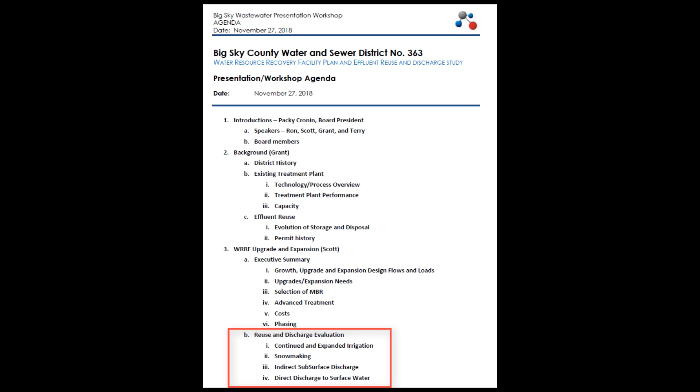Okay, this is part two, the presentation given on November 27th of the conceptual design report for the Big Sky Water Resource Recovery Facility expansion and upgrade. We ran long and ended up skipping the disposal slides and the disposal portion of the presentation. So today I'm coming back to go over those slides, record them, and Ron will add them to the website.

So we're going to pick up about where we left off on the 27th of November, which was disposal alternatives. We looked at essentially four reuse and or discharge alternatives. Snowmaking was technical memorandum number 11. Indirect subsurface discharge, tech memo number 12. Reclaimed water irrigation, so further development of purple pipe, is tech memo 13. And then direct discharge is spread across two tech memos: 14 is the analysis of disposal, discharge in the river, mixing zones, all that, and tech memo 15 is the outfall pipeline to get to the river.

Tech memo 10 gives a very brief overview of what was done with all of these subsequent reuse and discharge alternatives. So if you just want the short story, you can go to tech memo 10. If you want to dive deeper into any of these alternatives, you would go to their respective technical memorandum.

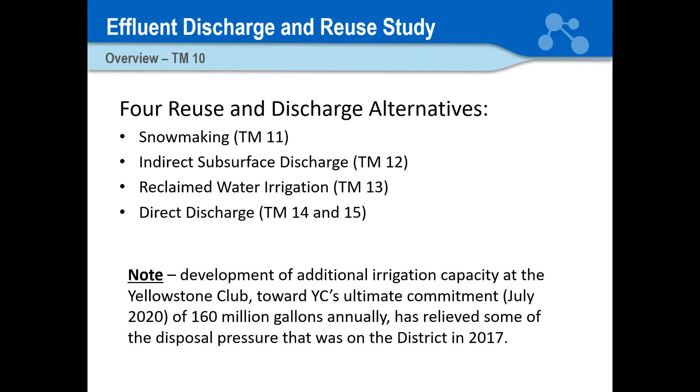This slide is also, it's in Tech Memo 10, the overview, and it's just showing the alternatives that were given a hard enough look to put a conceptual level cost estimate on it. So I'll just run through these real quick.

The snowmaking with reclaimed water, we looked at the Southern Comfort area of Big Sky Resort and disposal there. Now, a lot of the comments were, well, we can do a lot more than 16 million gallons. We don't disagree with that. It's just this was kind of a surrogate case to look at million gallons per acre, or just everybody being able to wrap their head around a given area, in this case Southern Comfort. How much can you dispose of there on average in a typical year? Well, that's 16 million gallons.

If Big Sky Resort and Spanish Peaks were to work together to put in more infrastructure, more guns, and cover more area, certainly you could get rid of more, but that's not in the district's control, so we just capped it there. The end result of that is not a great economy of scale, because as I'll show in a bit, you would need multiple pump stations and quite a bit of pipeline just to get to Southern Comfort. So it's approximately $2 million for 16 million gallons of disposal, so not a great trade-off there.

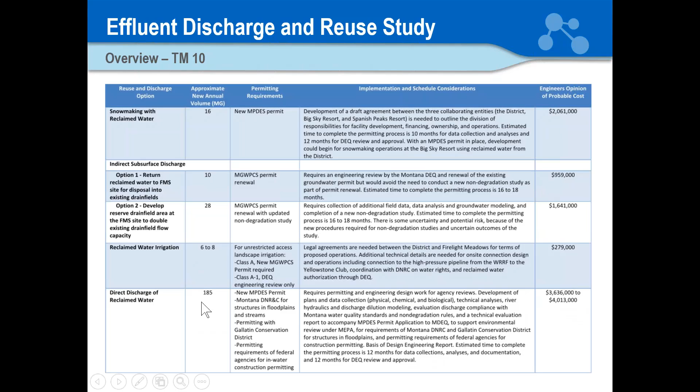I will be clear in the final draft about the difference between the 70 million gallons versus the 185 million gallons. This would be what I'd suggest be requested in a permit, but a lower number for average annual need.

And to everyone's point, that number can be driven down if other reuse alternatives are developed and grow in capacity. But the district's position is that ultimately we want a surface water discharge permit and that infrastructure for resiliency and redundancy in case there's a catastrophic failure up here on the mountain.

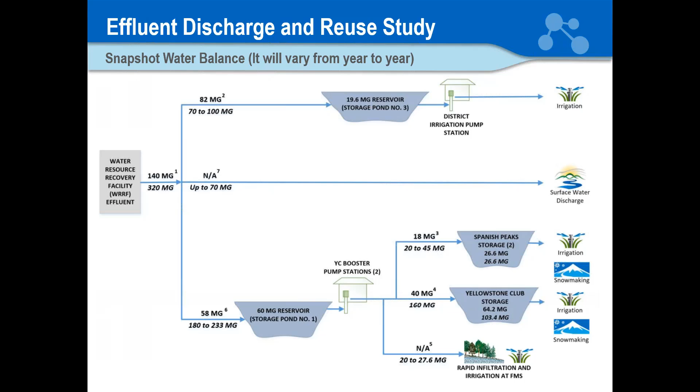So I'll spend a couple of slides on each effluent disposal strategy specifically. First would be snowmaking. It comes first in the report at Technical Memorandum number 11.

Snowmaking would require a surface water discharge permit—this is per discussions and meetings with DEQ. It's going to require Class A1 effluent, meaning total nitrogen has to be less than 5 milligrams per liter. That would require an upgrade above and beyond what the district currently has, for example an MBR facility that could get effluent down to 3 or 4 milligrams per liter to comply with that. So, to be clear, snowmaking requires at least the phase 1 upgrade that's recommended in the report.

One thing we want to be clear about is that snowmaking is not under the district's direct control. It'd be yet another third-party agreement for disposal. Control of that disposal would not be the district's. If someone decided to shut it off because we were having an exceptional early snow year, for example, those are uncertainties we just have to deal with.

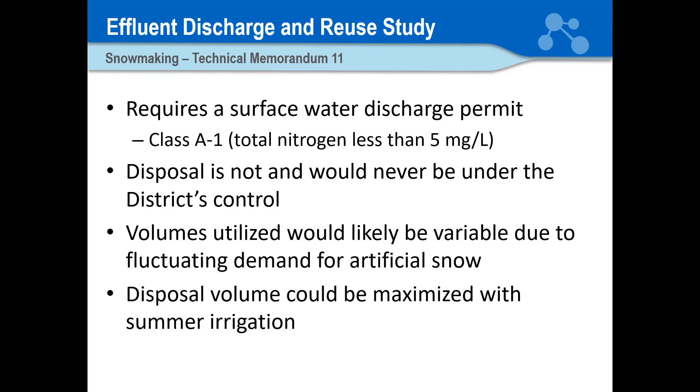As long as we're distributing effluent on the slopes for snowmaking in the winter, we could also utilize some of that for irrigation in the summer months. So that again just shows that that 16 million gallons is just kind of a little starter project. That 16 million gallons annual could be grown with strategies such as irrigating in the summer, or if Big Sky Resort decided to go a lot more aggressive with the amount of slope area they wanted to cover.

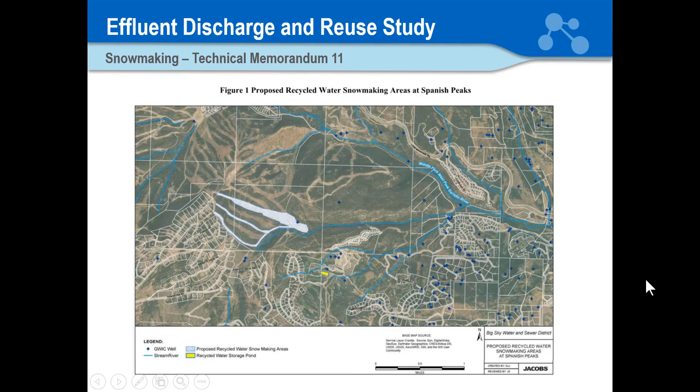This is a map, figure 1 from Tech Memo 11, highlighting those slope areas at Southern Comfort. The district already has the reuse pipeline passing Spanish Peaks and now connected to this recycled water storage pond as of last year, so we're already getting effluent to this reservoir in Spanish Peaks. It's not seeable here, but you need 2 lift stations - one to get it over this topography and into the Southern Comfort Basin, and another to lift it up the slopes. That infrastructure and the pipeline is what grows that infrastructure number up to $2 million.

This is an evaluation Jacobs did looking at yearly snowpack for the last approximately 16 years, snowpack at the Lone Mountain SNOTEL site, and then overlaying flows from the Middle Fork of the Gallatin River.

As Gallatin River Task Force has pointed out, this is their data. These spikes you see here are the middle fork of the Gallatin flow. These spikes are likely due to interference of ice with the flow metering, so we might remove this from the final draft or trend it down severely, because these are obviously outliers during winter flows. But keep in mind, this is the middle fork of the Gallatin River in black, and all these numbers behind it are snowpack at the Lone Mountain SNOTEL.

So as you can see, the snowpack grows over the course of the winter, tends to peak in this March-April timeframe, and then declines rapidly. For the most part, all snow is gone from that SNOTEL by end of June, which is good for this analysis, because what we're showing is that even at 8,800 feet, snowpack is essentially gone before the nutrient season. The nutrient season starts in July, and that's when we want to be absolutely done with any runoff of man-made snow, so we don't impact the impaired middle fork of the West Fork. So this was good news that showed it's actually quite feasible to put snow on, in this case Southern Comfort, and have that snowpack gone well before the nutrient season.

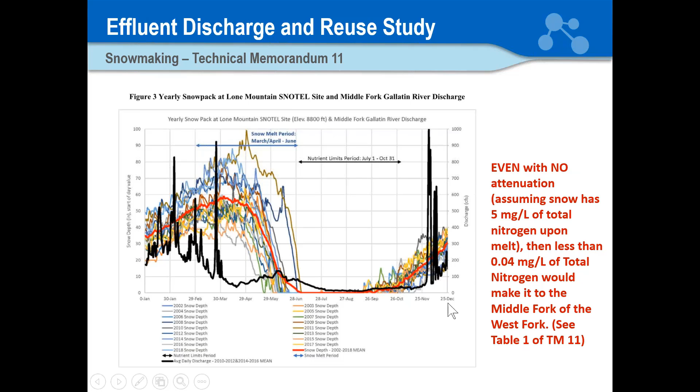That's just with simple dilution, no attenuation of nitrates or anything, which the Yellowstone Club snowmaking study done several years back showed there was about, I believe, 50% attenuation of the nitrogen in the snow beyond just dilution. So this indicates that it is feasible to make snow, put it on slopes there at Southern Comfort, and not impact the middle fork of the West Fork. So that's all promising.

Switch gears to indirect subsurface discharge. This is Tech Memo number 12. What was done in that Tech Memo was a screening analysis of 4 potential sites.

Of those 4, Firelight Meadows Subdivision was identified as the best candidate far and away, based on the distance from public supply wells. In this case, we're just looking at simple risk, not indirect potable reuse, but trying to mitigate the risk of having Class A1 effluent introduced into the district's groundwater. Being distant from public supply wells is a good thing. So that was one of the screening criteria.

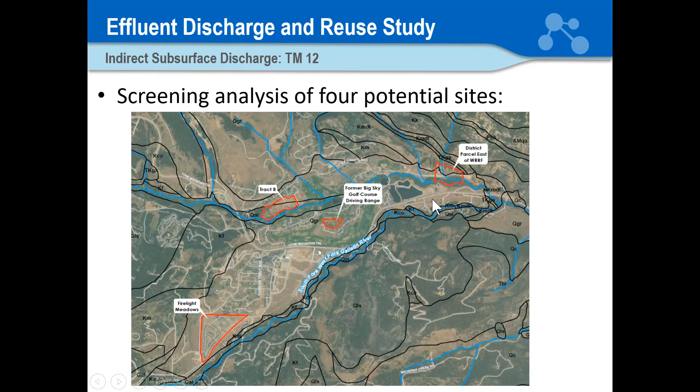Other screening factors: hydraulic conductivity and permeability of the zone between the bottom of that infiltration bed and uppermost groundwater. That was pretty good at Firelight Meadows. Probable groundwater flow direction and nearest probable intersection of that groundwater flow with surface water. So that's basically just an inferred connection between where we would discharge to the subsurface and where it would connect with surface water and appear as surface water.

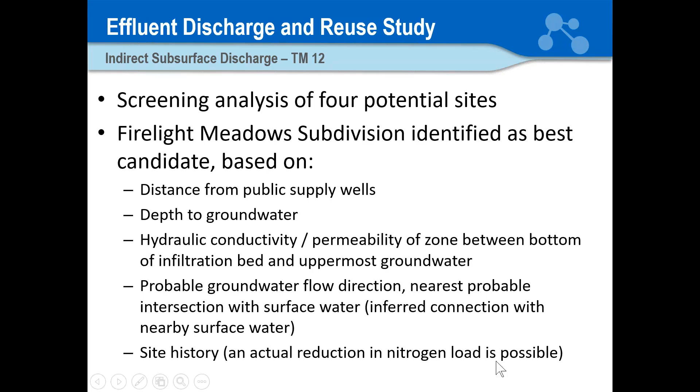And then site history. This is a slam dunk for Firelight Meadows. We know there's a significant nitrogen load occurring there right now that we could either equal with a lot more disposal, or even reduce, depending on the amount of water that we put there.

But even with Firelight Meadows, in order to get a discharge permit there and change potentially the amount of disposal that's done there, there's significant additional work required, most of it hydrogeologic studies. Looking at 2 test well installations, doing infiltration tests, pump tests, and site survey to verify which direction groundwater is flowing from that point of application. We'd also do some groundwater and surface water monitoring over 1 year's time to characterize connectivity between that subsurface disposal site and, in this case, the South Fork.

It's not clear at all that water discharged at Firelight Meadows is heading to the South Fork. It may be paralleling the South Fork and ending up in the middle fork of the West Fork. So we need to clarify that.

That would culminate in a hydrogeologic data summary report, which would serve as the basis of a subsequent nondegradation study. We'd also, as part of the results, have an updated groundwater model. We'd look at the mounding to see if it's possible to put more than 28 million gallons annually there without changing the flow direction of the groundwater significantly. And then look at the nitrogen and phosphorus loading and attenuation. So this is basically that nitrogen fate and transport study we've talked about.

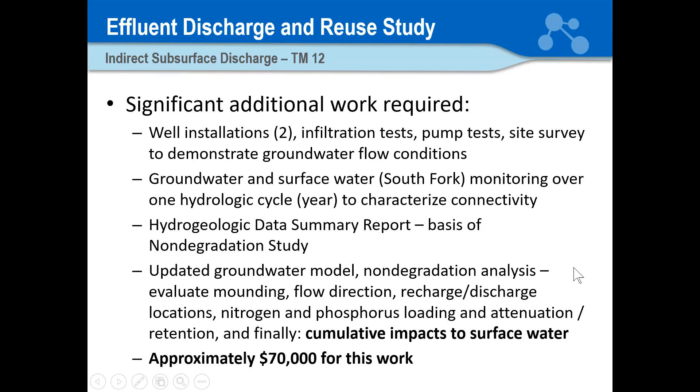Potential disposal, if all of that were to check out, would be that we could move up from the 49,050 gallons per day that is permitted there currently to as much as 98,100 gallons per day with that higher quality Class A1 effluent. And potentially during that study with the hydrogeologic model, you could look at disposing of more. The risk at some point is that you're mounding water there and it's going in directions that you didn't predict. So that's where our hydrogeologist stopped, this is a decent conservative estimate at this time for disposal there.

The existing drain fields at the Firelight Meadows property are in the back northwest corner, and then on this north piece here in blue. If we were to go in and expand it, this is just showing where we could add a subsurface discharge structure to increase the amount of disposal capacity.

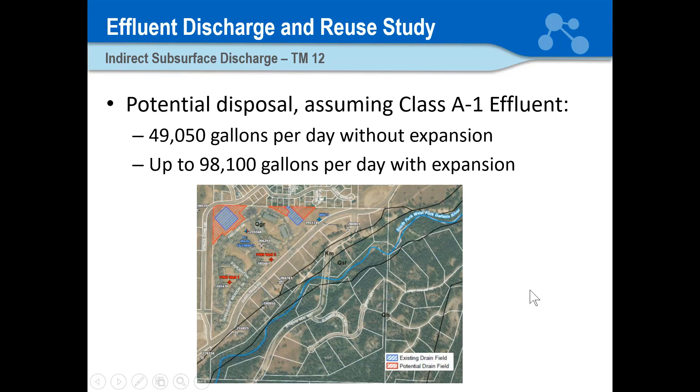Switching gears now to continued expansion of irrigation, or purple pipes. This is covered in Tech Memo 13. We looked specifically at Firelight Meadows because it served as another nice test case of how much water we can expect to get rid of per acre.

I just want to reiterate that the district looks at other incidental purple pipe installations as they come up, whether in town center or new developments, and they make those decisions based on economy of scale—how much the purple pipe costs to put in versus how much water can be gotten rid of. If it makes sense, I think they'll continue to do that.

It's good because it reduces current demand on the groundwater supply. We need that for potable water purposes, and if we can replace irrigation that's using potable water with reuse water, that has a benefit on both the wastewater disposal side and the water supply side.

So this is just showing the open space in that wheat color. Existing irrigation is shown in green, so that's all water that would be disposed of. We could irrigate both of those—this would be the landscape, and this is just the open space. The open space is not currently irrigated.

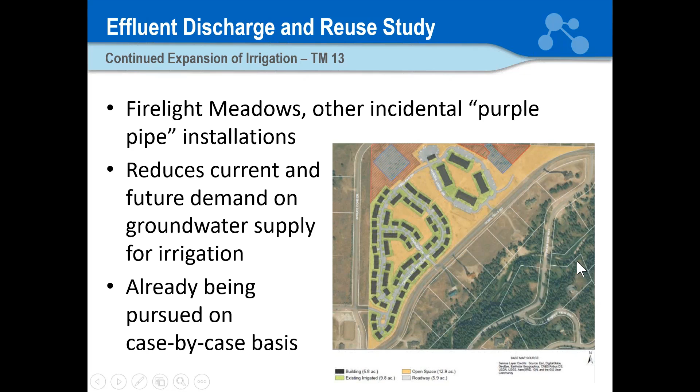And finally, Tech Memo 14, direct discharge. I want to reiterate that the district once had a direct discharge permit to the Gallatin River that was let go in 2003. I'll show some specifics, but that permit allowed up to 15 million gallons of disposal across the March through June season—15 million gallons max in a year, spread across March, April, May, and June.

The primary reason the district needs a direct discharge permit and outfall is as a backup for infrastructure failures. So if there was a landslide that took out the 7-mile reuse force main between here and the Yellowstone Club, the district would lose a huge portion of its reuse portfolio and have nowhere to go with a large portion of their stored water.

That's kind of that failure scenario where—almost anyone else in the country has a surface water discharge permit that's not reliant on all that pumping and infrastructure, and so the district needs that as well, as a backup for that situation.

That's that higher flow, that kind of 160 million gallon per year number that I would pursue if I were the district with DEQ. I wouldn't need that annually—not if I keep marching down this path of developing other reuse accounts. I would not need anywhere near that annually, but that's what I would go for to protect against these emergency situations.

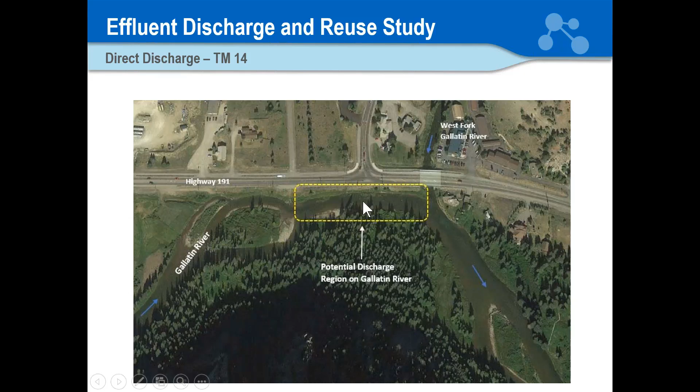So this is just some excerpts of that surface water discharge permit that the district used to have, that expired in 2003. Here are the outfall effluent water quality requirements: 30 milligrams per liter of BOD, 30 milligrams per liter of TSS, half a milligram per liter of phosphorus, and 5 milligrams per liter of total nitrogen.

So these numbers, we would be well below those. If and when this comes to fruition, we'd be well below 30 and 30. We'd also be well below 5 and 0.5.

This table is just showing the pattern of disposal over those months. In March, they were able to discharge up to 150 gallons a minute; April 160, May 300, and June 525. This is trying to follow the pattern of snow melt and runoff and flows in the Gallatin, basically sneaking that effluent in under peak flows in the Gallatin.

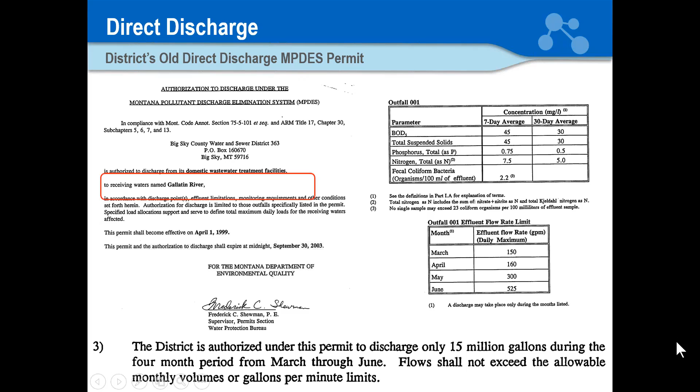Tech Memo 14 also includes a summary of site conditions on the Gallatin River based on preliminary assessments, review of direct discharge concepts and available chemistry data on the river, a comparison of current effluent disposal quality from the SBR facility versus the water quality criteria for the Gallatin River, and an assessment of those dilution credits that would be needed to achieve compliance with an MPDES permit.

A review of key issues and data needs to proceed with permitting a new discharge. So all this report does at this time is lay out how the district would need to procure a permit from DEQ. There are studies required, submittals to DEQ. Once you start, this is a year or two process from actually having a permit in hand. So this is nothing that's going to happen very quickly.

There's also a summary of potential benefits of seasonal direct discharge to the Gallatin River. This doesn't pencil out very well, and in essence it's just too little flow in the Gallatin to make much difference. The additional flow from the district might be 1 CFS when flows in the Gallatin are on the order of 200 or even 1,000, so it's just not enough water to make a difference in terms of benefiting low flow periods.

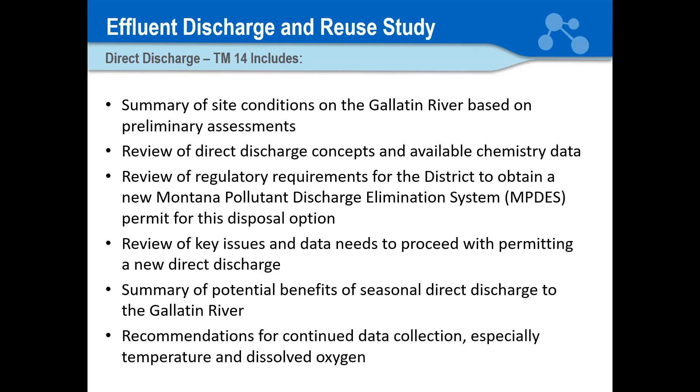The goals of this preliminary study for direct discharge were to identify a good site with good discharge mixing in a defined reach, comply with Montana's numeric water quality standards outlined in DEQ 7, and ultimately design a discharge to maintain river morphology and aesthetic quality of the site.

We did some preliminary conceptual designs just to show what we would be thinking that would meet this criteria, so it's not going to stick out like a sore thumb down there. And then that outfall, as we all know, would have to be resilient to ice flows, which can be significant here and tear away an outfall if it's sticking out in the middle of the river, so that was important, as well as floods. And then select a site and a design that would protect aquatic habitat and stream use.

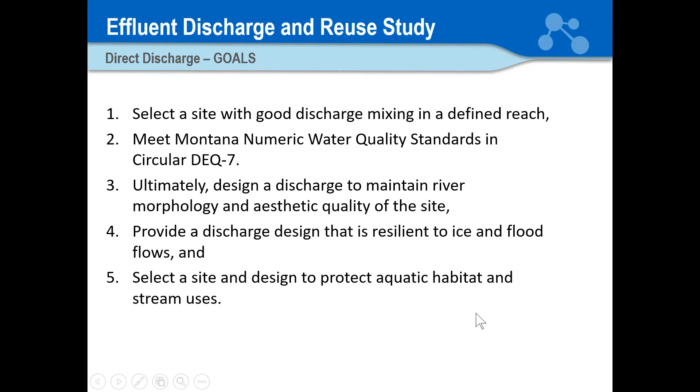The screening evaluation of potential direct discharge to the main stem Gallatin shows that the river flows provide enough dilution credits necessary for a discharge of the existing treatment plant. This is the SBR plant that the district owns and operates right now. That effluent could potentially comply with surface water discharge standards right now in the non-nutrient season.

There are a couple of hits in the priority pollutant data that's been taken on the existing effluent. It's some organic carbons that would need to be removed, but all this is saying is that the current regs in theory would allow for the current district effluent to be discharged to the Gallatin River with dilution credits. That is not the plan.

Phase 1, if it moves forward, is expansion and upgrade of the existing facility to a membrane bioreactor facility that's going to generate a much higher quality effluent. This is just to show that it's possible now. It'll certainly be feasible with a much improved treatment plant.

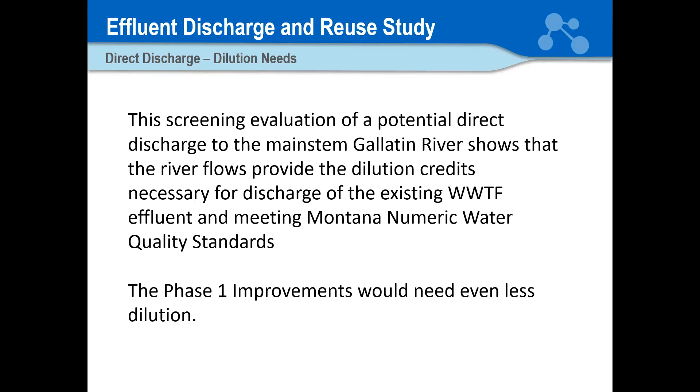Meeting Montana's numeric water quality standards and non-deg criteria for non-significant changes in surface waters is feasible. So again, we'd avoid any discharges during the nutrient season, which is July 1st through September 30th for the Middle Rockies ecoregion level 3.

Based on spreading that flow across the winter months, effluent flows could be less than 2% of the river flow even under the lowest flow conditions of 7Q10, and less than 0.4% for average daily flows in the river during that discharge period. So we're thinking November, December, January, February, March time frames. This would attain less than 15% of the lowest applicable standard at the end of the mixing zone, which complies with the non-deg criteria for non-significant changes in surface waters.

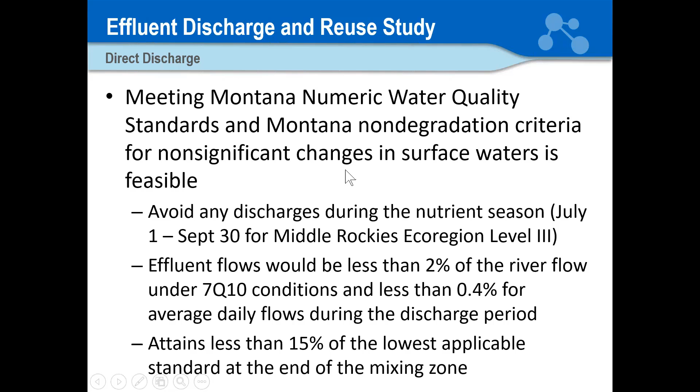Again, we would not be discharging during that late summer, early fall nutrient season. Effluent could be metered, meaning it's going to be stored as usual, and what's discharged into the river could be a steady rate over months, or it could vary with river flows. There's a number of options there.

Regardless, there's extensive study remaining to be done in support of a permit application. A lot more data collection of effluents and ambient river quality analyses and reports that would summarize that data. There's permitting requirements and hurdles and meetings we'd have to have with DEQ, and once the district decides to take this on or not, there's also public perception, acceptance, and education that would occur. My point again is that the district is not currently pursuing this.

It's going to be a 1 to 2 year hurdle once they push the go button. So it's nothing that's going to happen fast, and everyone will have an opportunity for input.

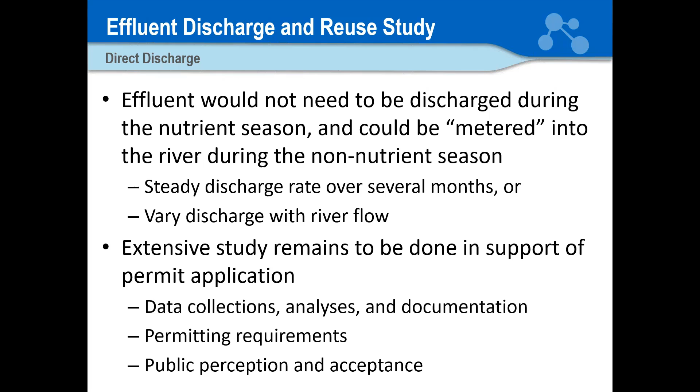Direct discharge. This is showing measured Gallatin River flow at the USGS Gateway gauge and calculated Gallatin River flow above the confluence with the West Fork of the Gallatin River. There's no USGS or anybody else monitoring flows in the Gallatin River upstream of the West Fork, upstream of Big Sky. That's unfortunate, and it's been the case for decades. So Montana DEQ developed a correlation between flows at the Gateway gauge and flows above the confluence with the West Fork.

Basically it credits 71.6% of the flow at the Gallatin Gateway gauge as the daily flow in the Gallatin River above the confluence with the West Fork of the Gallatin. So it picks up about another 30% of its flow between Big Sky and the Gallatin Gateway gauge.

So the Gallatin River Gateway gauge is shown in orange here, and the direct correlation of flows above the West Fork is in blue. Based on this estimate, winter flows tend to bottom out around 200 CFS, then start climbing in April and May, typically peaking around early June at maybe 2400 CFS, and then tapering back down to that low winter period of approximately 200 CFS. This would be the nutrient season outlined here, July through September.

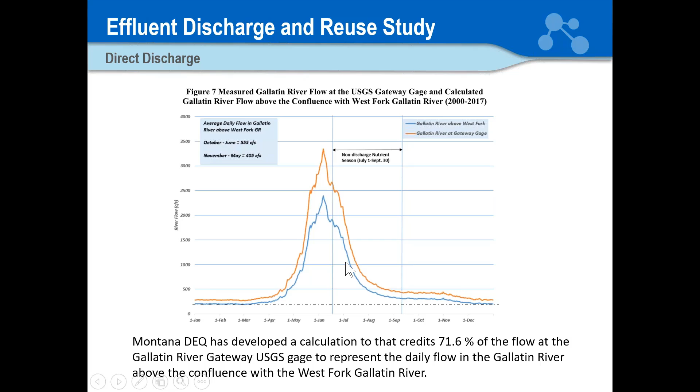So they're doing an estimate based on the runoff basin, the surface area of the basin, and getting 129.3 CFS, which, in our opinion, is extremely conservative based on this correlation equation between Gallatin Gateway flows and flows upstream of the West Fork. So we took that value and used it — my only point here is that I think there's another definite layer of conservancy there.

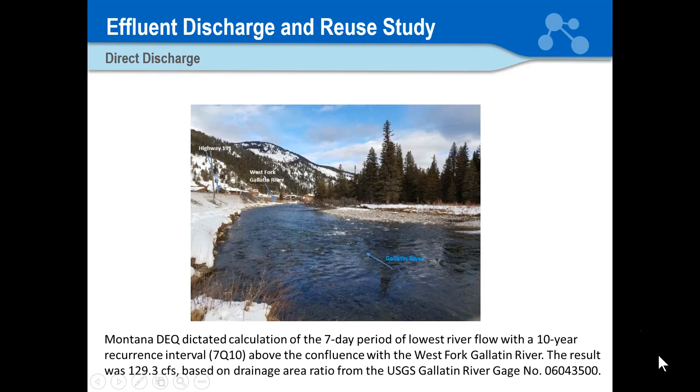And then shifting gears to what this might actually look like: Highway 191 running here, an outfall pipe coming under the highway and discharging into the west side of the Gallatin River, and then we would protect it with boulders from ice flows, trying to keep it in place over the course of those ice flows.

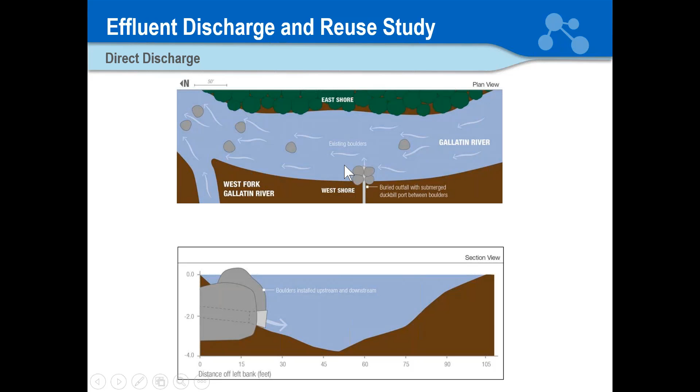This would be a buried pipe — you would not see it standing above the shore here. This is just a section cut of what that would look like. This is what we call a duckbill check valve. It helps put some resistance on there and create a jet velocity across the discharge, so we get further out into the river and get more dilution.

Had the highest cost at 13 cents a gallon for disposal. That cost comes down a bit with indirect subsurface discharge at Firelight Meadows. If you did nothing to the existing rapid infiltration beds there, this cost that's almost $1 million is basically to tap into the district's existing reclaimed pipeline, high pressure pipeline, stepping down pressure, likely putting in a bladder tank there, and then running pipe over to the infiltration beds.

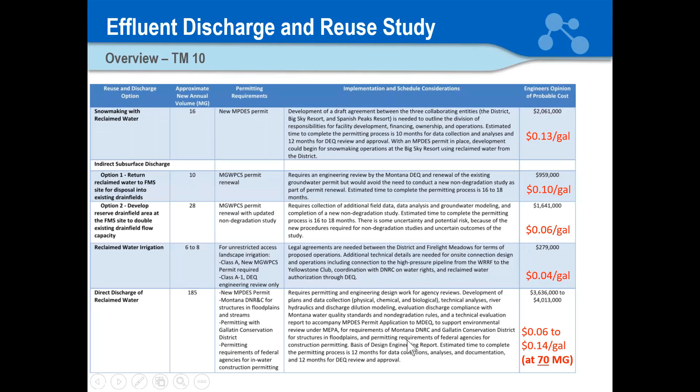That covers what was not covered in the November 27th presentation. If anybody has any questions or comments, they can continue to submit those to the district, and they will be addressed in some form eventually. So thank you for your time.